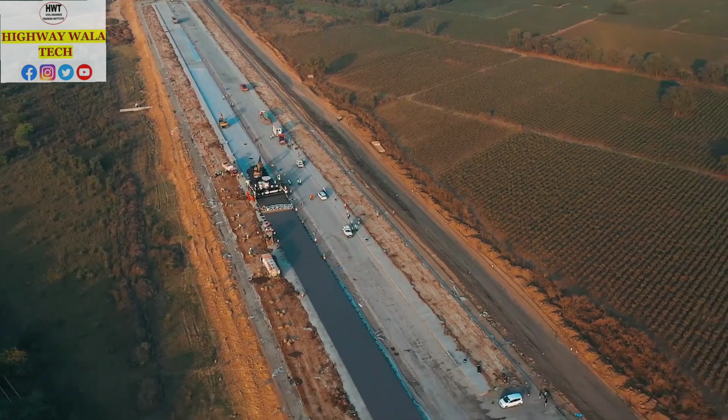NHAI in this Delhi-Mumbai Expressway have already made an international record. 94,400 cement bags, 1,169 metric ton fly ash, 14,613 metric ton concrete production, 120 tippers.

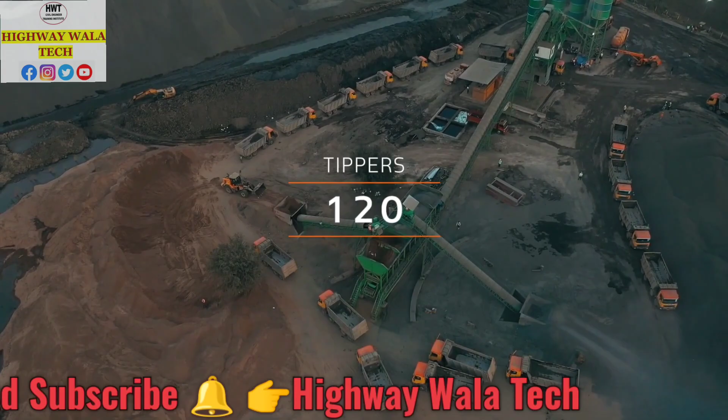On February 2nd, 2021, history was created in the road construction segment in India. Myself, M.K. Chaudhary, representing India Book of Records. This is Dr. Manish Vishnoi, heading Golden Book of World Records.

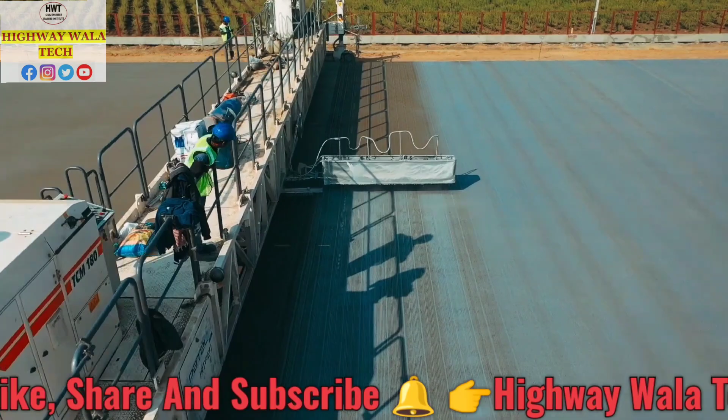They had vision to concretize the history, and very proudly I can say, they are able to reach that.

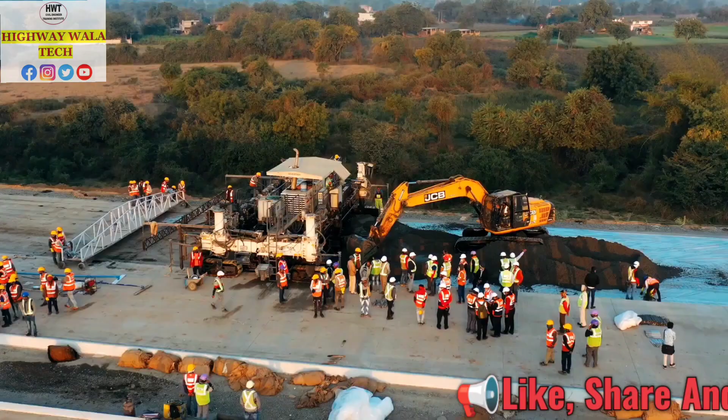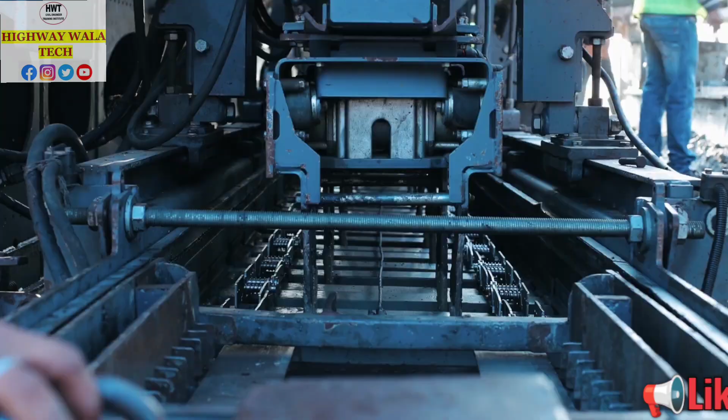Patel Infrastructure Limited's committed team of more than 1,000 experts, engineers and skilled workforce achieved the unprecedented feat of laying a 10.32 lane kilometer concrete road within 24 hours as part of the prestigious Delhi-Mumbai Express Highway. Concreting the History by Patel Infrastructure.

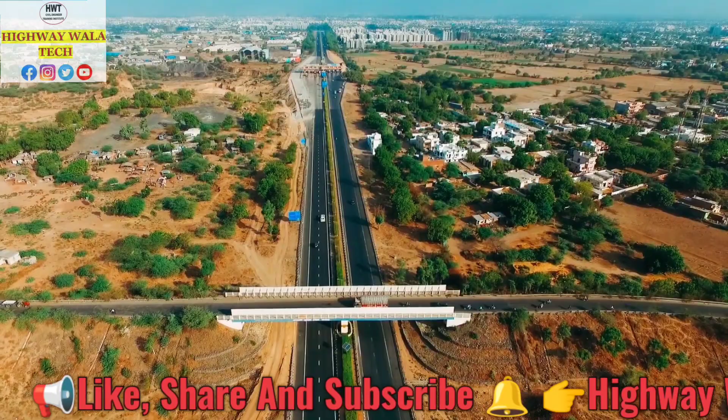Road construction has a direct bearing on the nation's economic growth. For 50 years, Patel Infrastructure Limited has contributed to nation building through its numerous activities in building construction and later in road and infrastructure development.

Patel Infrastructure Limited's forward-looking management truly believes that a road is so much more than its physical form. It is a means that connects makers with markets, students to schools, sick to the hospital, and entrepreneurs with opportunities.

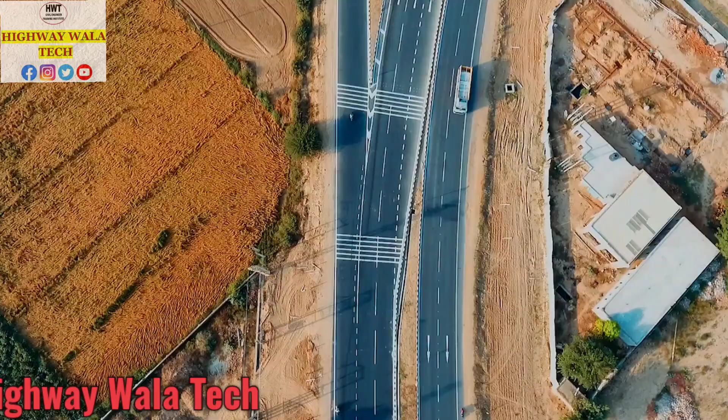Built on the foundation of quality, excellence and hard work, the company has made it a mission to give its best towards the cause of Atmanirbhar Bharat. It is this zeal and enthusiasm that has made the game-changing world record possible.

I'm very sure Parth and me would be very dedicated towards the company, and we would create something that is even better than what my grandfather would have thought of.

For Patel Infrastructure, the nation's progress is foremost. The company is passionately endeavoring to contribute to India's dream of becoming a $5 trillion economy by 2024-25. The speed of roads and infrastructure development is crucial in making this dream a reality. Meaning, if road construction speed is more, the economic growth will also speed up.

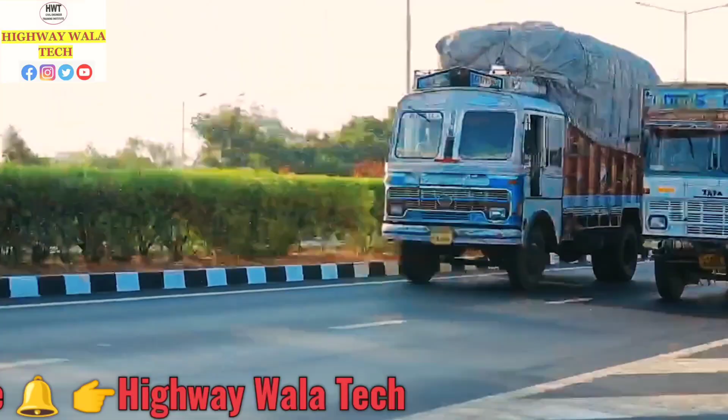Hence, innovations are needed to increase the speed of road constructions in the country. From here germinated the aspiration of putting an effort that brings about a transformative change in road construction speed in India.

Around this time in the year 2018, the company came face to face with the opportunity of bidding for a section of the prestigious Delhi-Mumbai Express Highway, India's longest and the most important express highway, totaling 1,350 kilometers.

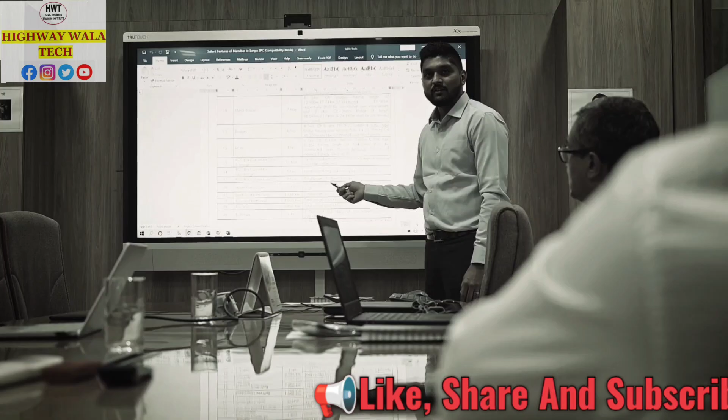And it was the perfect project. On an immediate basis, I got a vibe that this is something that I was looking for, and this is something that our company needs right now. So we went into more research, and we just realized that we are quite late, and there were only 2 days left to submit entire copies and do all the process of NHAI and bidding and everything.

At any situation, we needed the bank guarantee by 6 p.m. in the evening, and when I was analyzing, it was already 12. So we had only 6 hours to get the bank guarantee.

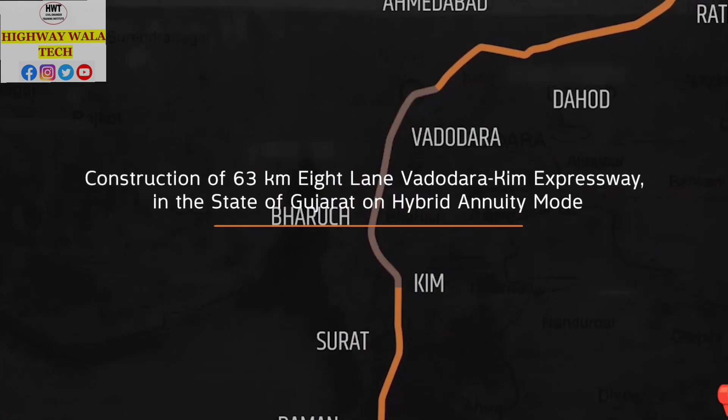They did it. They overcame the challenge of securing a massive bank guarantee in less than 6 hours. The company won the bid for Package 2 and Package 3, which comprised the construction of the 63-kilometer 8-lane Vadodara-Kim Express Highway in the state of Gujarat on hybrid annuity mode.

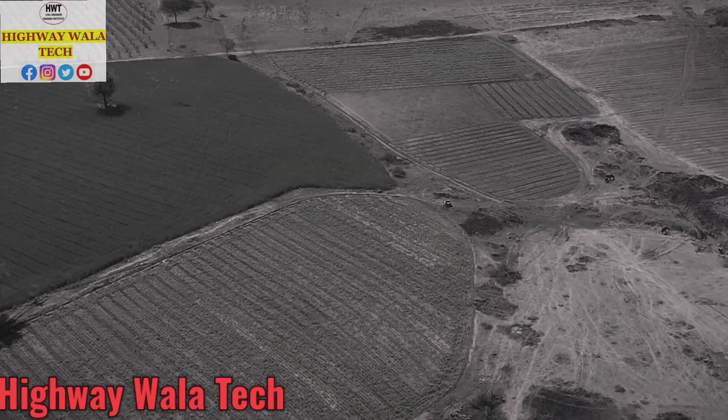It was ultimate, a short notice decision taken, but after bidding and reaching on site, you get those feelings that no, it was a perfect decision at the perfect time and the most ideal thing that a company wants. And then the show began.

And then we are on the go, we have got our project, we have got financial closures, we have got funds on the ground to work, we have mobilized ourselves and everything, so beautiful, but still something missing. You always need a cherry on the cake.

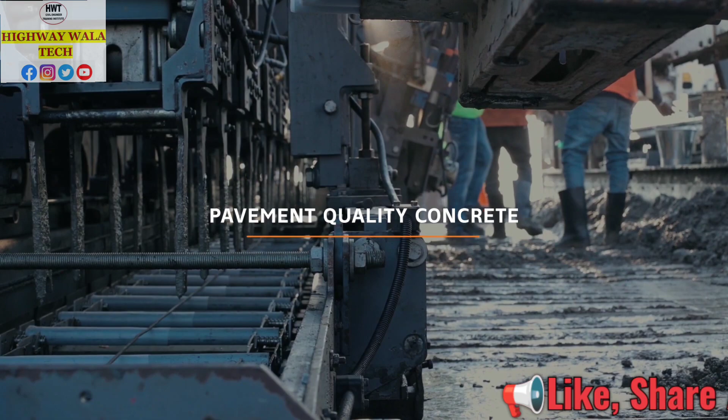Paving of PQC, meaning pavement quality concrete, is typically carried out in slip form method. In this method, compaction, laying and finishing of concrete are carried out within the length of a single machine.

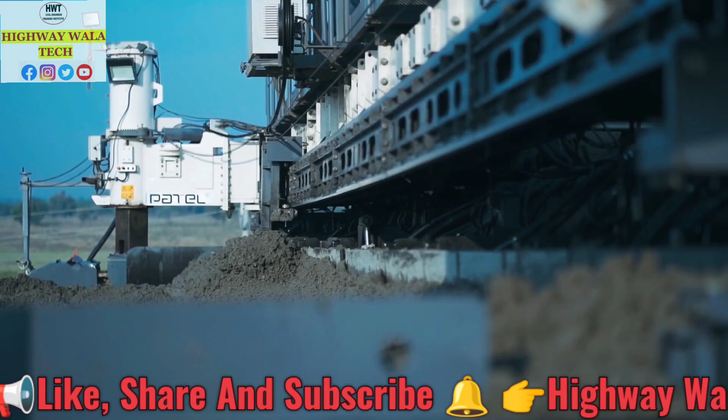The company soon realized that the PQC paver it has ordered would be the world's largest PQC paver. It can lay 18.75 meters PQC in a single pass and build a jointless road lane, a first in India. This feature improves road quality and will substantially enhance the driving experience of the user.

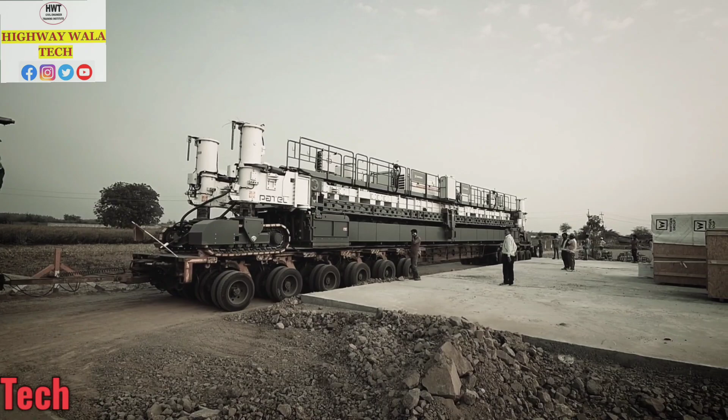The company's top management decided to utilize this opportunity to push the envelope and pave the way for establishing a new benchmark in road construction speed, which directly benefits the nation's growth.

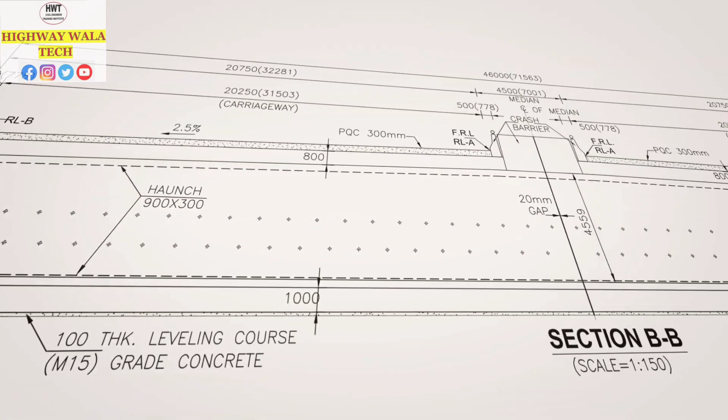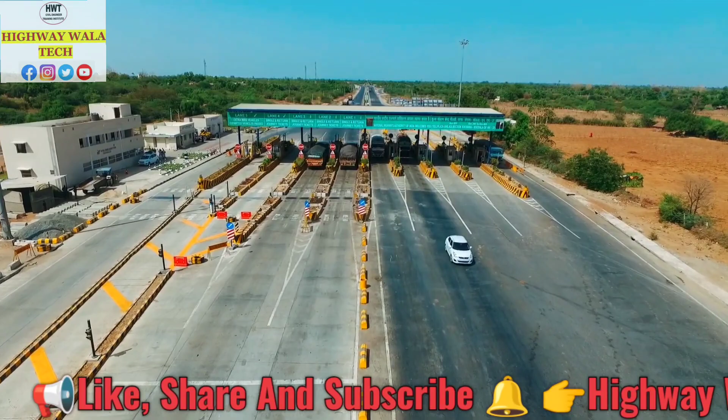A dedicated team of the company started analyzing the parameters that define the speed of road construction. This process required a lot of due diligence. 3 dimensions were considered: challenging the key variables that determine speed, feasibility study of project site, and World Record Agency's requirements. Finally, the company articulated not 1 but 4 world records, which individually and collectively have the potential to impact the growth story of the entire nation. The proverbial cherry on the cake now looks secure.

The targeted world records are: highest quantity of pavement quality concrete laid in 24 hours, target of 12,000 cubic meters. Largest quantity of pavement quality concrete produced in 24 hours, target of 12,000 cubic meters.

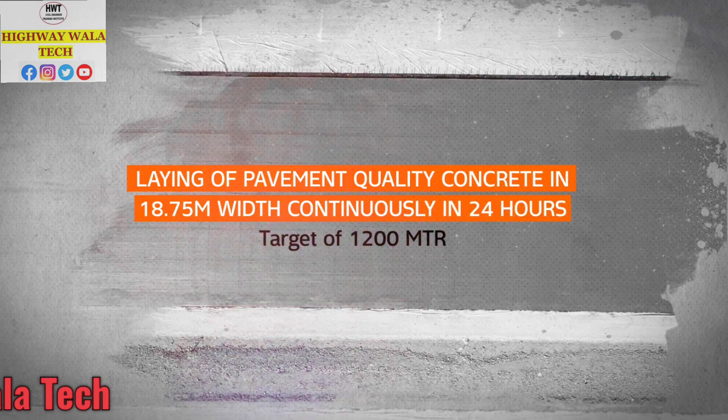Laying of pavement quality concrete in 18.75 meters width continuously in 24 hours, target of 1,200 meters. Largest area of rigid pavement quality concrete laid for an expressway in 24 hours, target of 37,500 square meters. By now, everyone at Patel Infrastructure knew that they are standing on the threshold of history.

There are 4 agendas or 4 points, I can say, which are really important and crucial to understand: planning, organizing, coordinating and controlling. So if you miss anything of this, you may have failure. But this is what teamwork is, this is what at Patel we are.

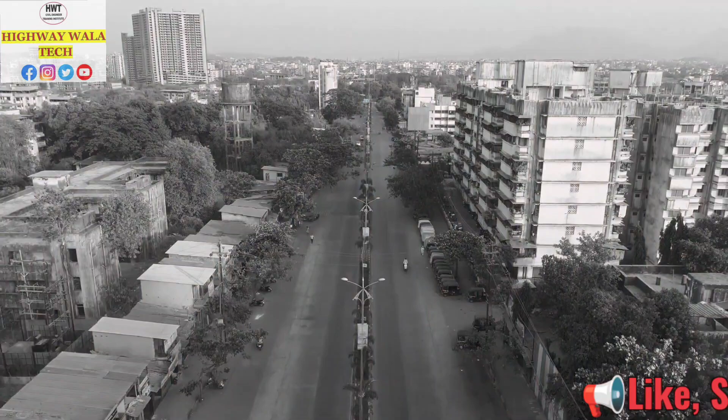The world's largest PQC paver was inaugurated on February 25, 2020, following which the company's management came to the drawing board to put the plan of a world record in action. Within days, they hit a significant roadblock. The COVID-19 pandemic was spreading furiously, and the entire world had come to a standstill. Naturally, the company had to hold its operations and keep the plans on the back burner.

Months passed by. They waited patiently. Slowly, the work resumed at the site. And finally, on December 19th, 2020, the company fixed the date for execution of the world record.

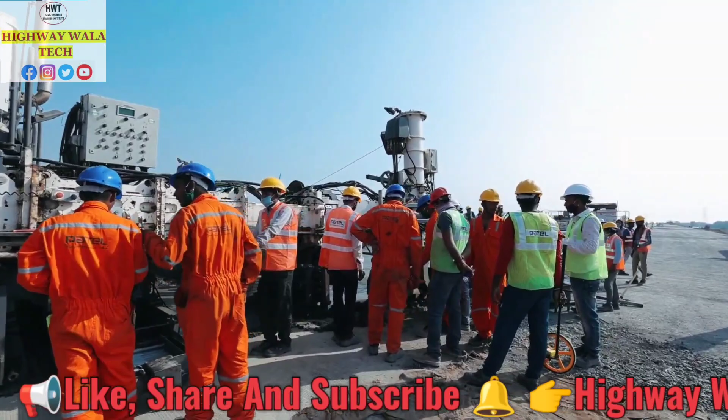The site team was given deadlines to keep the stretch ready for PQC laying. All of this was to begin at 7 a.m. on February 1st, 2021. To achieve such targeted work, we require vigorous planning and various efforts of the manpower.

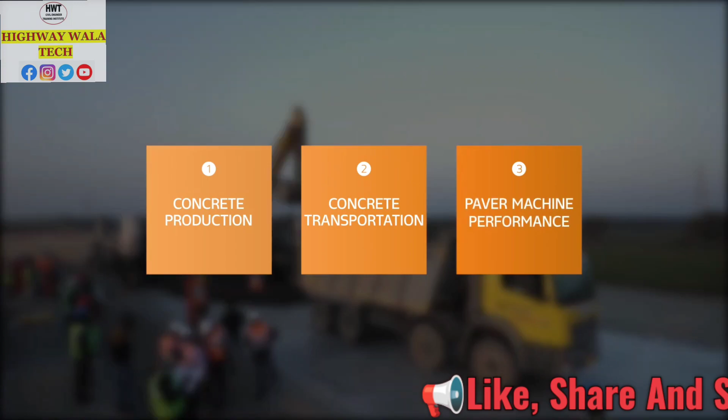The goal is unprecedented, so the planning and preparation had to be unlike anything done before. The entire process's three main pillars were concrete production, concrete transportation from plant to record site, and ensuring smooth paver machine performance. Each of these pillars has to be supported by material supply, process control, and on-site troubleshooting.

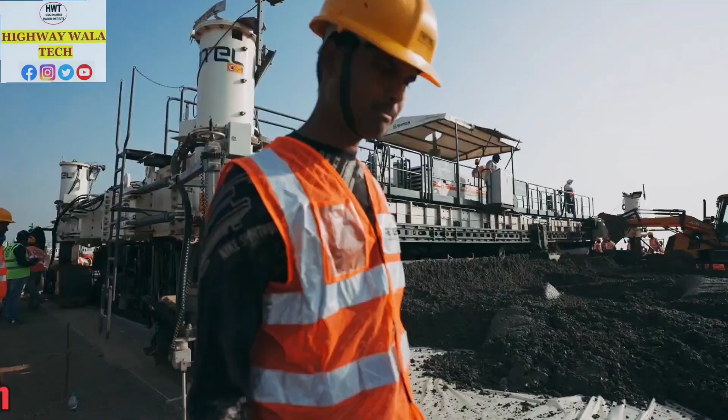Under the managing director's chairmanship, the management formed a site team. Their task was to chart out every minute detail vital to success on February 1st. Detailed micro-level planning was carried out for procurement of raw material like cement, fly ash, dowel bar, tie bar, and more. The procurement of recurring spare parts for the slip-form paver and RMC plants was put in place. The OEMs were on standby to service any emergency.

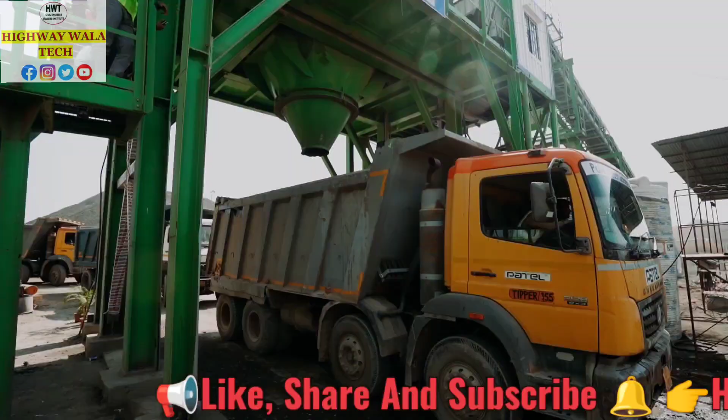The heart of the world record is production of more than 12,000 cubic meters of pavement quality concrete, PQC. The concrete produced at the production facility near the site has to be transported to the record site using tippers. A detailed route plan to achieve the non-stop movement of tippers without any logistic snarl was prepared.

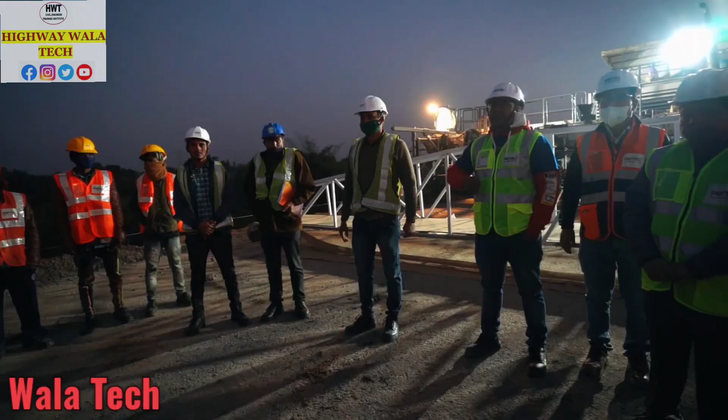Furthermore, practical methods for communication between site staff and drivers were put in place. Experts imparted training to personnel at each level of the hierarchy. I just called up a meeting with the original equipment manufacturers. Everything was planned related to the spare parts and inventory.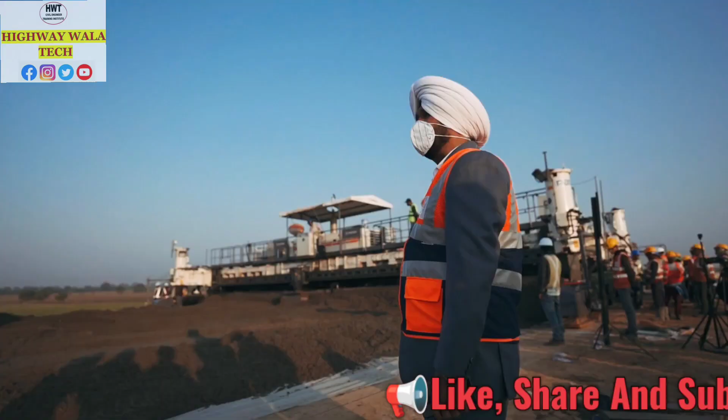At every weighbridge we have introduced one standby. This engineer is there at the weighbridge who will direct the tippers where they have to go. The operators inside the weighbridge also knew what they have to do.

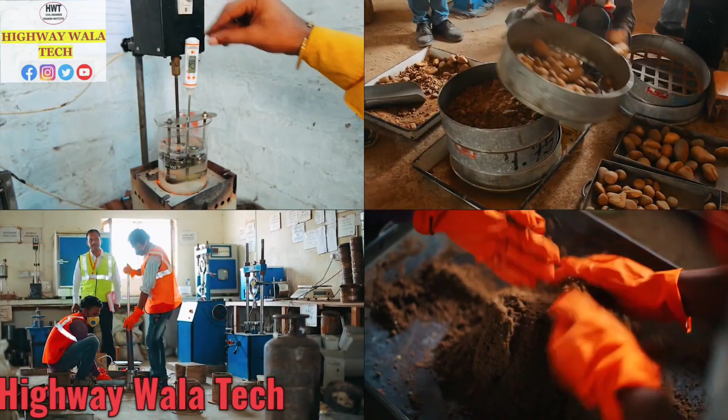Quality is integral at Patel Infrastructure. Irrespective of on-field challenges, the company never lets the final output suffer. The entire team is oriented to constantly create new benchmarks and not just look at the project from a cost management perspective.

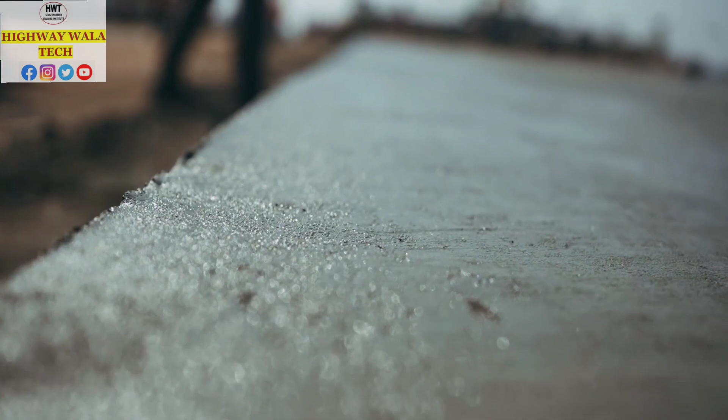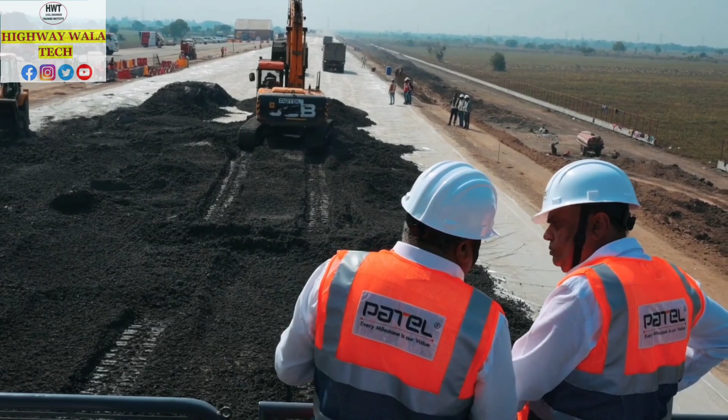For the world record, it was imperative to operate 24 hours continuously. Special arrangements for the boarding and catering of the entire staff were made. A team oversaw the distribution of food among the groups in sync with the operation schedule. Safety and security of the personnel was of critical importance too. It was a clear mandate from the top management to execute this feat without any hazard.

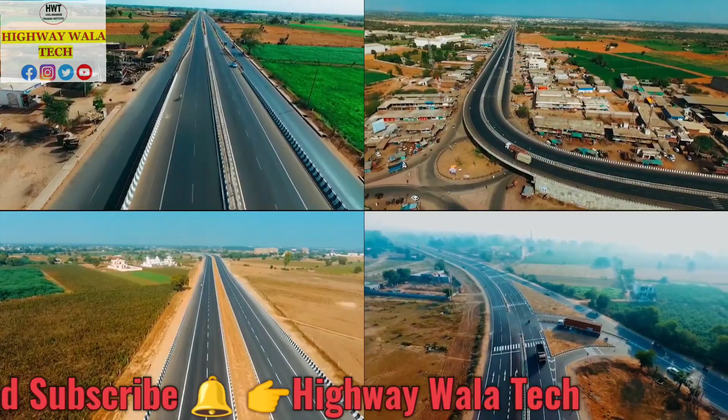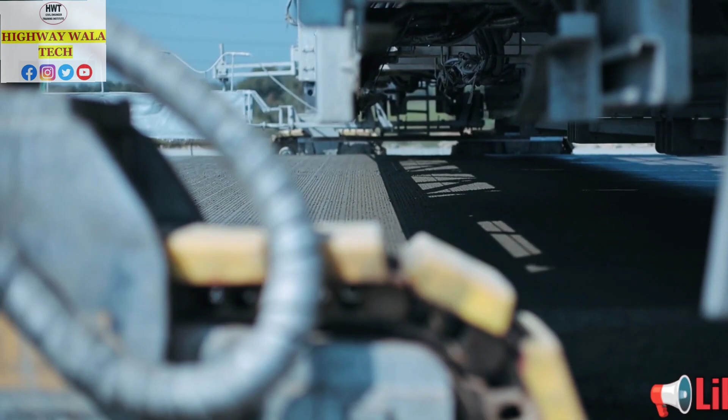This time, the challenge was to perform in front of world record adjudicators and within the stipulated targets. Hence, every aspect had to be monitored carefully. Desired quality aspects like temperature, humidity, and wind velocity were noted on an hourly basis for 1 week before February 1st, 2021. This was necessary to estimate the atmosphere on World Record Day and prepare an action plan as per the weather changes that occur during 24 hours.

I joined in 2002, and from then onwards we have never looked back. We started with highway construction in 2002-03, now reaching the stage where we are going to establish a world record for a day. We have never doubted the operational capacity of Patel Infrastructure. We have completed projects like that in the past, so establishing the world record is not a problem.

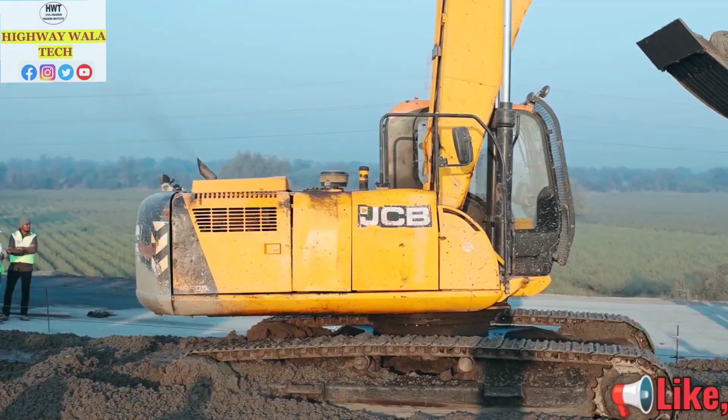After numerous man-hours of discussions and rigorous planning, everything looks in control. The entire project team is motivated to perform and excel.

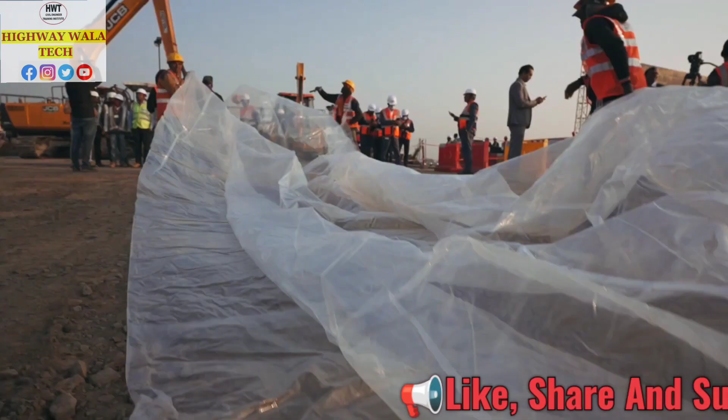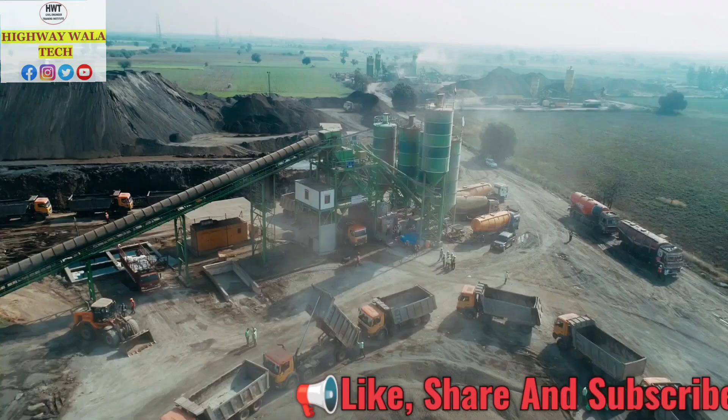The day has arrived. For 2 years, Patel Infrastructure's team has been nurturing a dream, and finally, the moment is here. Morning, February 1st, 2021. The concrete production has begun, and the heavy-duty tippers are ready to transport the first batch of concrete to the PQC laying site. On the other side, the 18.75 PQC paver machine turns on, ready to get on with a record-making task.

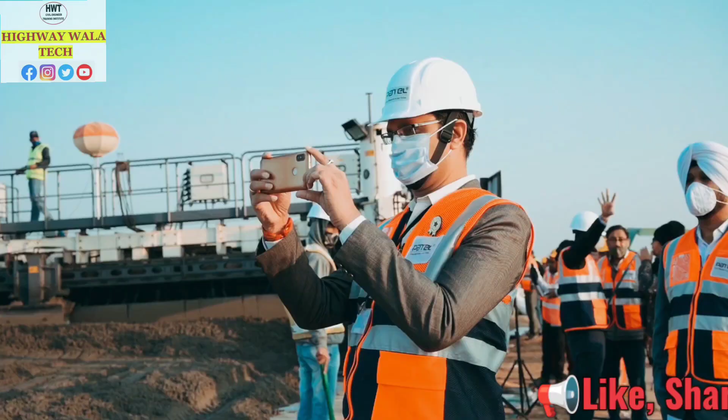And here are the adjudicators from India Book of Records and Golden Book of Records. Along with them, you too can witness the making of history. The big question in everyone's mind is, how will the day progress? Will everything go as per the plan?

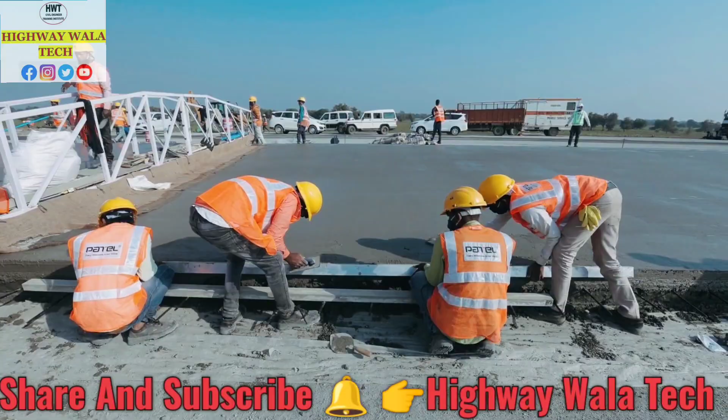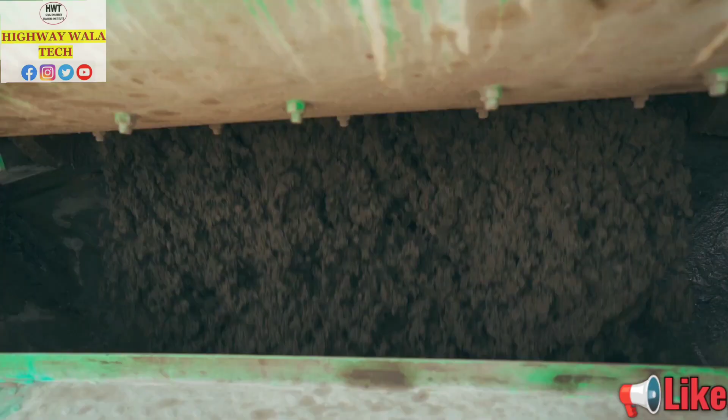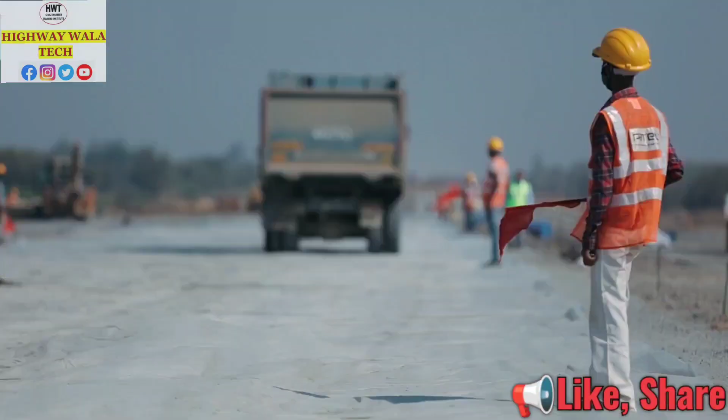Forenoon, February 1st, 2021. All departments are in control. The concrete production is going on as per the plan. The tippers collect the concrete, pass through the unmanned weighbridge and reach the PQC laying site through a designated route. The entry and exit route for the vehicles is separate, thus avoiding any clash. Currently, the material is moving at an average speed of 36 to 40 vehicles per hour.

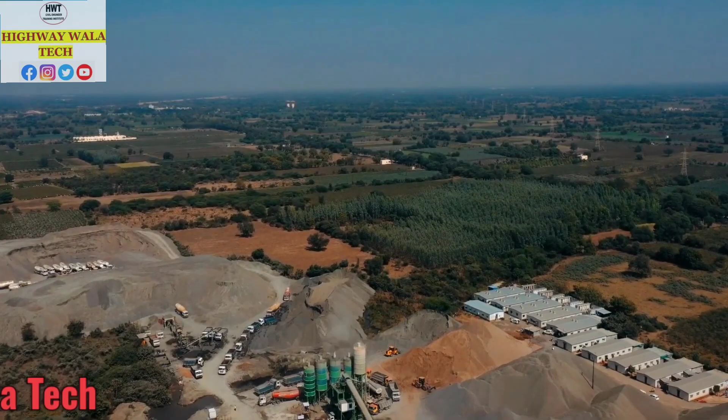Myself Subhash Nagar, STM head, taking care of the procurement and store activities for the Patel group. Under the tagline of concreting the history, we were given the task of arranging the bulk materials. The role of the procurement team and our store team was to manage the weighbridges for recording the output from our batching plants, and the frequency of vehicles passing through the weighbridges was approximately 36 to 40 vehicles per hour.

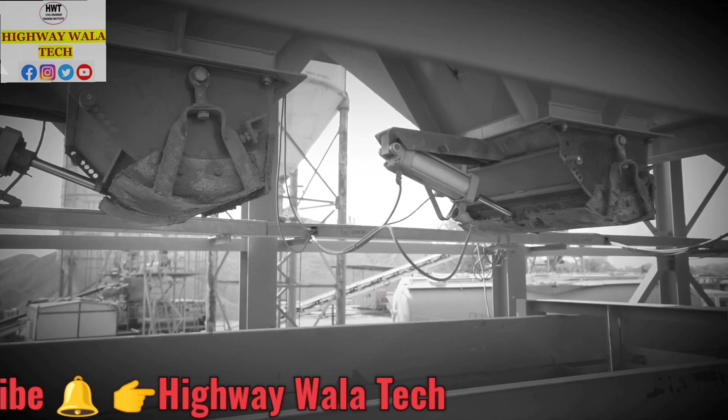Afternoon, February 1st, 2021. Something critical has gone wrong. One of the concrete production plants has stopped working due to a technical error. This stoppage can seriously affect the supply of concrete to the site. Secondly, the PQC paver cannot be left empty for long, nor can it be turned off while still midway. If the problem is not resolved, we are looking at big trouble.

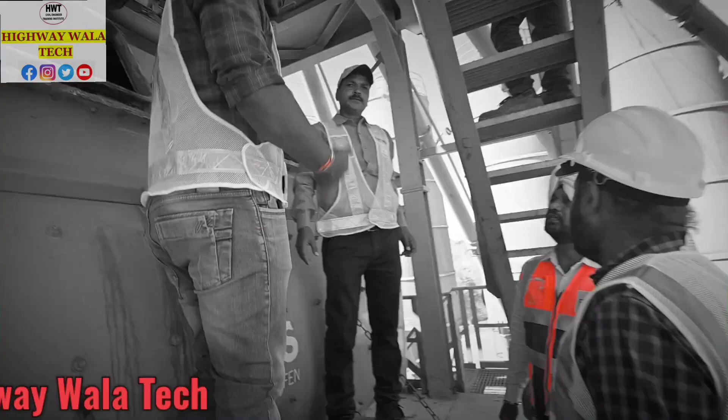There was a problem in the plant and it was totally rectified. Now the plant is running smoothly because our OEM, meaning original equipment manufacturer, team is there. So they have already rectified the problem.

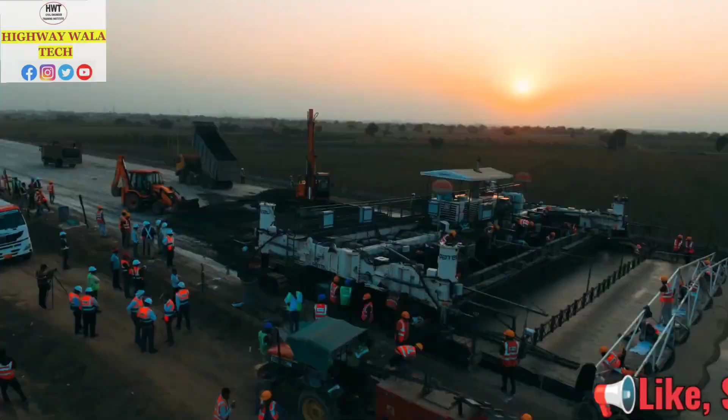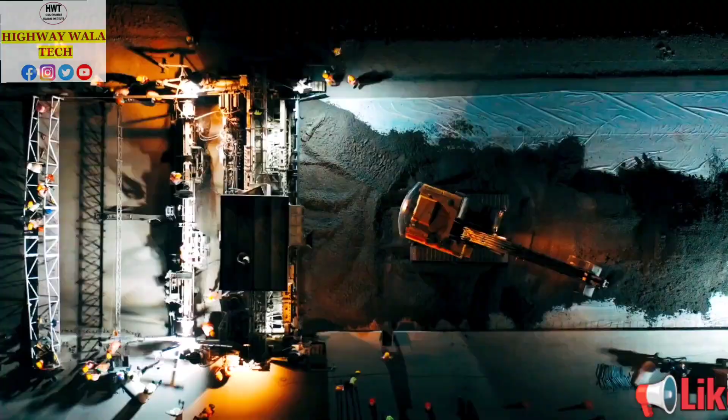It is all going well, and we have entered the early hours of the night. Night, February 1st, 2021. The entire team, the engineers, the supervisors, the drivers, the machine operators, the workers. Every department is working in complete synchronization, just like a well-conducted musical symphony.

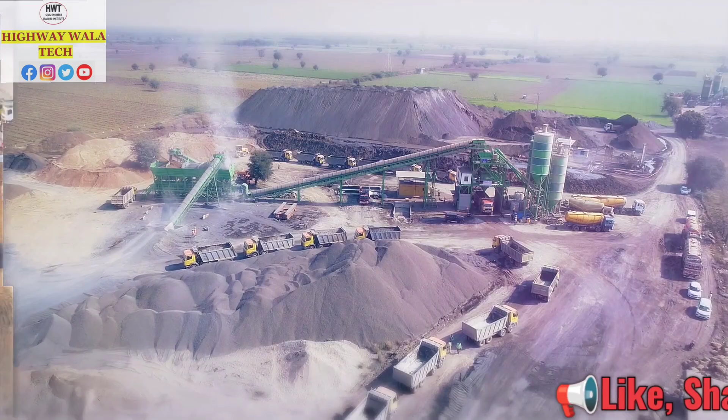This day turns into a brilliant demonstration of planning and execution where the man, the machine, and the material converged to create an engineering marvel. 1,250 workforce strength, 3 machines, 120 tippers, 6 RMC plants, 34,415 metric tons of material.

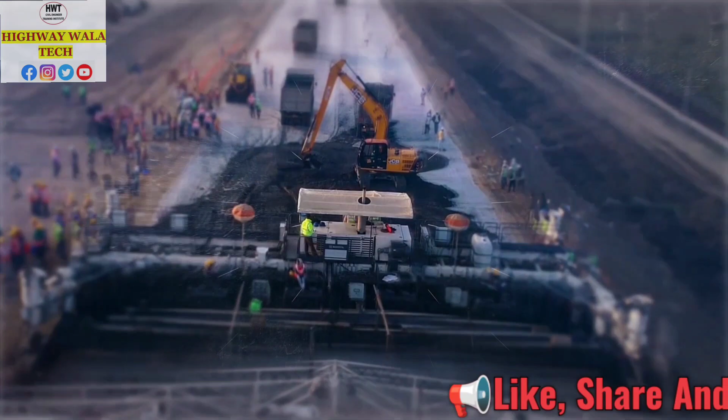Morning, February 2nd, 2021. This day marks the dawn of a new beginning. Road construction speed in India now has a new benchmark. They have made history.

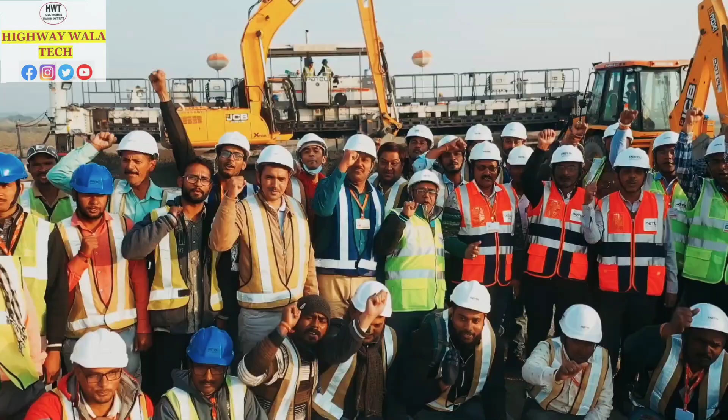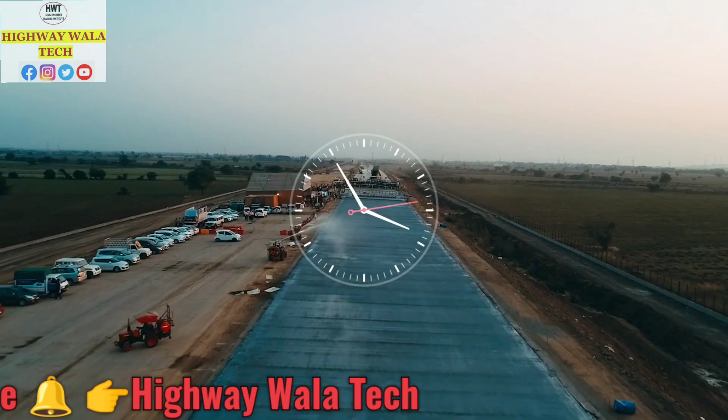Great things happen when a dedicated team works towards a shared dream. Patel Infrastructure Limited didn't just achieve the target, but surpassed it to establish a new world record in 4 separate categories. They completed this in 24 hours, beginning at 8 a.m. on February 1st, 2021 to 7:59 a.m. on February 2nd, 2021.

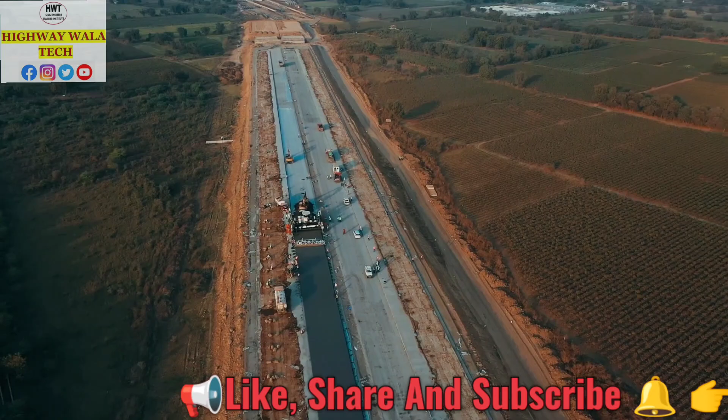Patel Infrastructure Limited surpassed their attempted targets and successfully achieved 4 distinct world records. Let us understand the scale and immensity of these achievements. World Record 1: Highest quantity of pavement quality concrete laid in 24 hours. 14,613 cubic meters. This is equivalent to 5,412 African forest elephants.

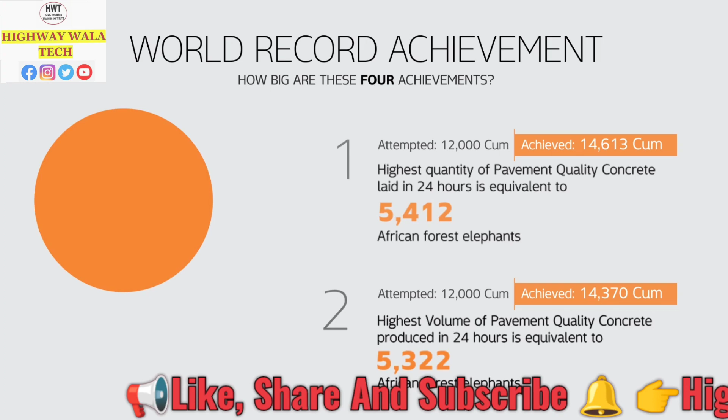World Record 2: Largest quantum of pavement quality concrete produced in 24 hours. 14,370 cubic meters. The volume is equivalent to 5,322 African forest elephants. World Record 3: Laying of pavement quality concrete in 18.75 meters width continuously in 24 hours. 1,280 meters. This is comparable to 17 full-size airplanes lined up in a straight line.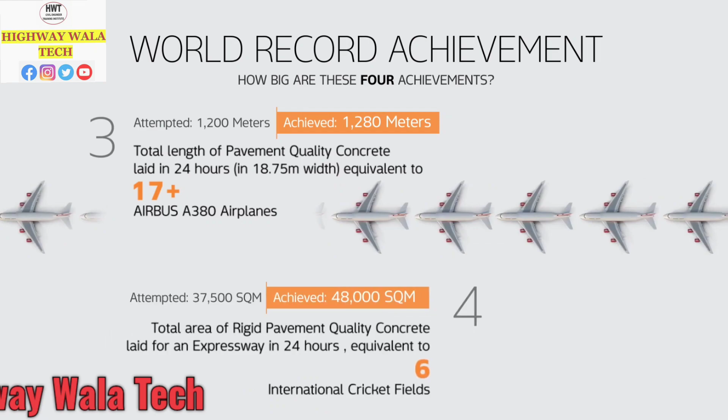World Record 4: Largest area of rigid pavement quality concrete laid for an expressway in 24 hours. 48,000 square meters. This area is comparable to nearly 6 international cricket stadiums.

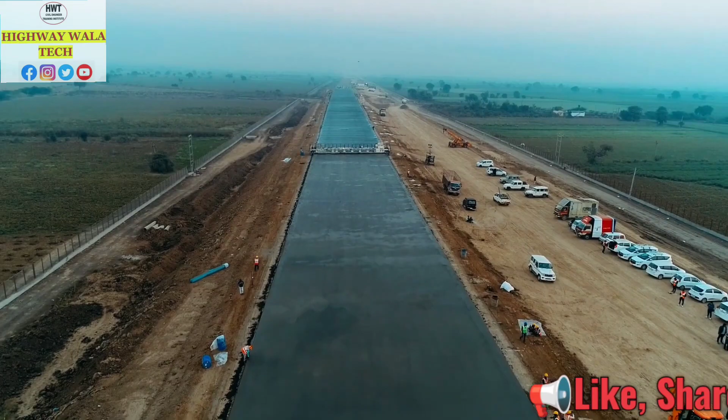As much as this is a moment of pride for the company, it is also a significant milestone in the nation's growth story. As per the latest records, India's average road construction speed is 29.6 lane kilometers per day. The new benchmark created today by Patel Infrastructure is of 10.24 lane kilometers road construction within 24 hours, effectively achieving a third of the nation's total capacity. Add to this superior quality, which will go a long way in giving an impetus to India's economic growth.

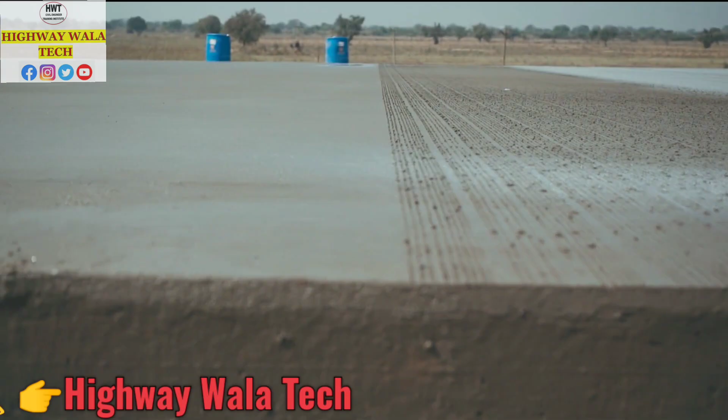This feat received a special mention by the Road Transport and Highways Minister of India, Shri Nitin Gadkari, in the Parliament on February 4, 2021.

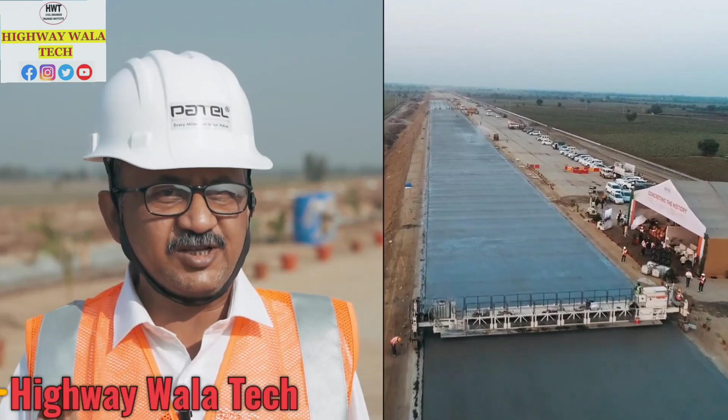It's a huge effort which has been done by our team. It is an effort which will not only make Patel Infrastructure employees proud, but every Indian is going to be proud of this. Today we can say that we have created a milestone in such a way that nobody can break it in a simple way. Investment in the road is directly proportional to the GDP. Such a massive investment created in 24 hours. So many suppliers have got such a massive quantity of job.

The audacity to dream, commitment to the nation's growth, and conviction to persevere. Patel Infrastructure combined these qualities with teamwork, planning, and focused effort. This makes the company a cradle for progress and innovation.

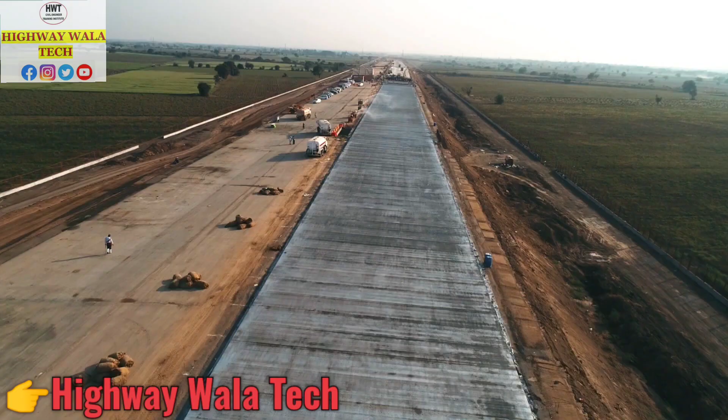12,000 cubic meters of concrete laid in just 24 hours. We have a tagline today for this event, concreting the history, and I would proudly say that we have concreted the history, and this is the moment where my grandfather would be so proud of us, that this is what he wanted from Patel Infrastructure, from my kids and from the company, and this is where you need to place the company.

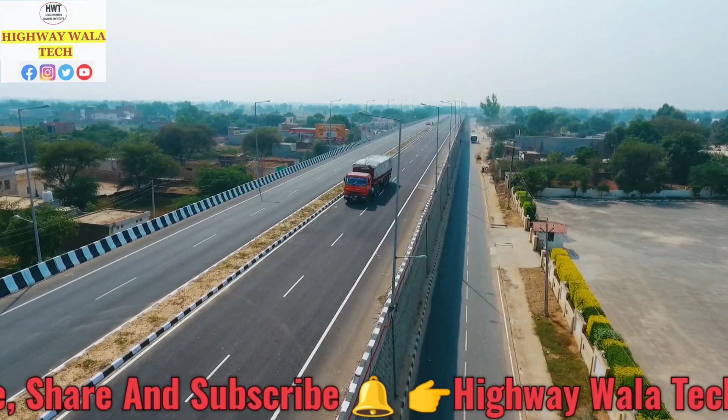India is a nation of 1 billion dreams. Patel Infrastructure's world record achievement is a significant milestone towards the realization of these dreams. The company's ability to innovate brings in new technology and, more importantly, enhances travel and transport quality for everyone. In a few years from now, when you enjoy your travel on the smooth and seamless Vadodara-Mumbai Expressway, you will truly experience the essence of Patel Infrastructure's world record.